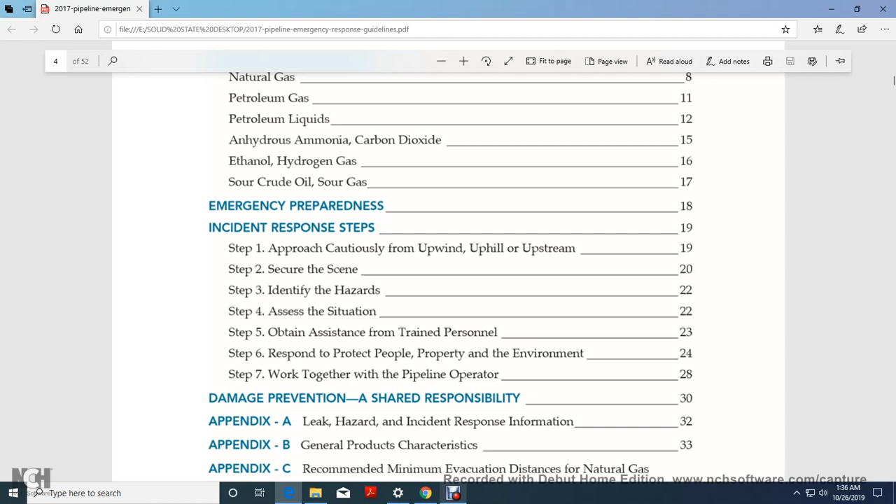Damage prevention, a shared responsibility. Appendix A: leak, hazard, and incident response information. Appendix B: general products and characteristics. Appendix C: recommended minimum evacuation distance for natural gas transmission pipe leaks and ruptures. Appendix D: natural gas leaks inside a building. Appendix E: storage facility, additional resource emergency response capabilities.

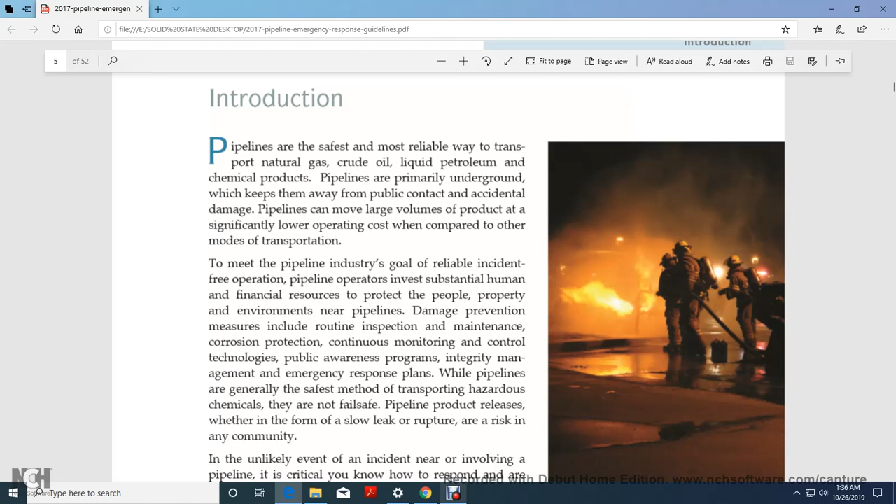Introduction: pipelines are the safest, most reliable way to transport natural gas, crude oil, liquid petroleum, and chemical products. Pipelines are primarily underground, which keeps them away from public contact and accidental damage. Pipelines can also move large volumes of product at significantly lower operating cost compared to other modes of transportation, helping meet pipeline industry goals of reliable, incident-free operation.

Pipeline operators invest substantial human and financial resources in protecting people, property, and the environment near pipelines. Damage prevention measures include routine inspection, maintenance, corrosion protection, and continuous monitoring and control technology, public awareness programs, integrity management, and emergency response plans.

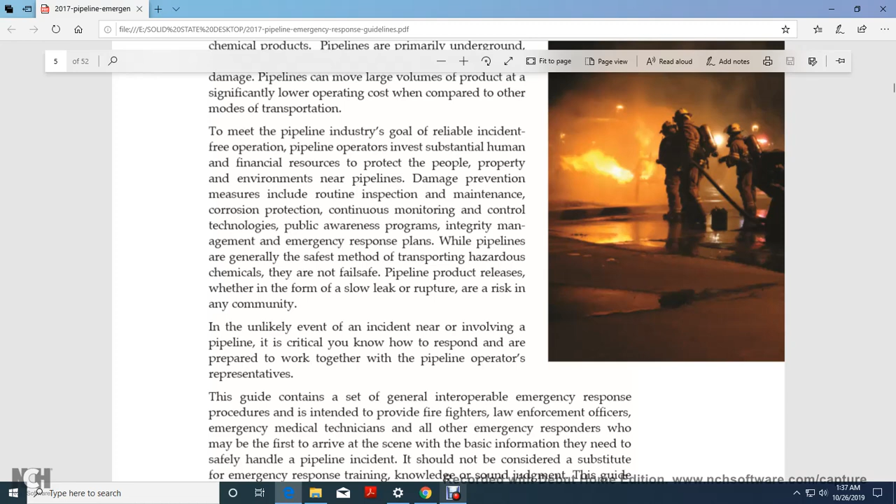While pipelines are generally the safest method of transportation for chemicals, they are not fail-safe. A pipeline product release, in the form of a slow leak or rupture, is unlikely, but in the event of an incident near your community, it's critical that you know how to respond and are prepared to work together with the pipeline operator's representatives.

This guideline contains a set of general, interoperable emergency response procedures intended to provide firefighters, law enforcement officers, emergency medical technicians, and other emergency responders who may be first to arrive at the scene with the basic information needed to safely handle a pipeline incident. It should not be considered a substitute for emergency response training, transportation knowledge, and sound judgment.

The guide contains information that will help you make decisions about how to best protect your emergency response team and the surrounding public during a pipeline incident. Please review and become familiar with these emergency response guidelines before you're called to respond to a pipeline incident.

Pipeline basics. Before we discuss how to respond to a pipeline incident, let's quickly review the basics about pipelines: What are pipelines? What purposes do they serve? Where are pipelines located? How will you identify the pipeline right-of-way with the use of pipeline markers? And how do operators monitor pipeline performance and ensure reliability?

Pipelines in your community. Pipelines are essential; they provide the energy needed to drive cars, heat homes, and cook dinners. People rarely consider how they get the petroleum, natural gas, and other chemical products necessary to power their daily activities.

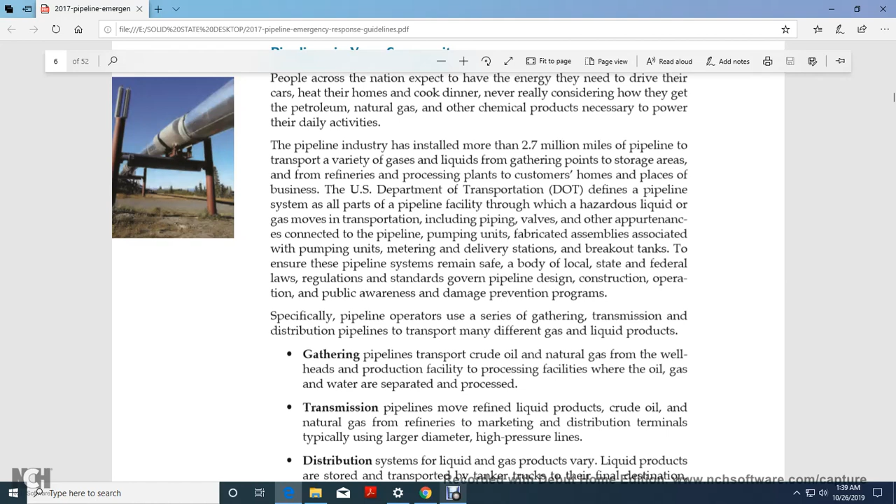The pipeline industry has installed more than 2.7 million miles of pipeline, transporting a variety of gases and liquids from gathering points and storage areas to refineries and processing plants, and on to customers' homes and businesses. The U.S. Department of Transportation defines a pipeline system as all parts of a pipeline facility through which liquid or gas moves in transportation, including pipeline valves and other appurtenances connected to the pipeline, pumping units, fabricated assemblies associated with pumping units, metering and delivery stations, and breakout tanks. This ensures the pipeline system remains subject to local, state, and federal laws, regulations, and standards governing pipeline design and construction.

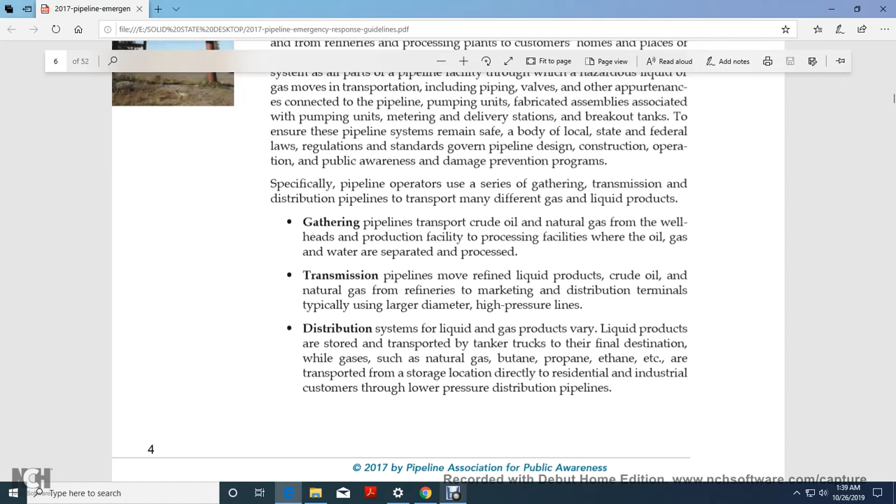Specifically, pipeline operators use a series of gathering, transmission, and distribution pipelines to transport many different gas and liquid products. Gathering pipelines transport crude oil and natural gas from wellheads to production facilities, where oil, gas, and water are separated in the process. Transmission pipelines move refined liquid products, crude oil, and natural gas from refineries to marketing distribution terminals, typically using large diameter, high-pressure lines.

Distribution systems for liquid and gas products vary, but liquid products are stored and transported by tanker trucks to their final destination, while gases such as natural gas, butane, propane, and others are distributed differently.

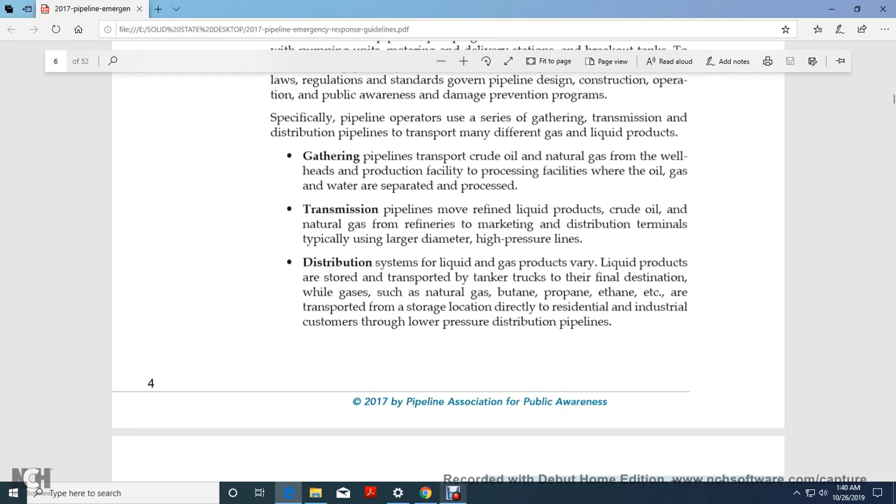Products are transported from a storage location directly to residential and industrial customers through lower pressure distribution pipelines and pipeline rights-of-way. Although typically buried underground, pipelines may also be found above ground in extremely cold, harsh environments, at pump and compressor stations, valve stations, and terminals.

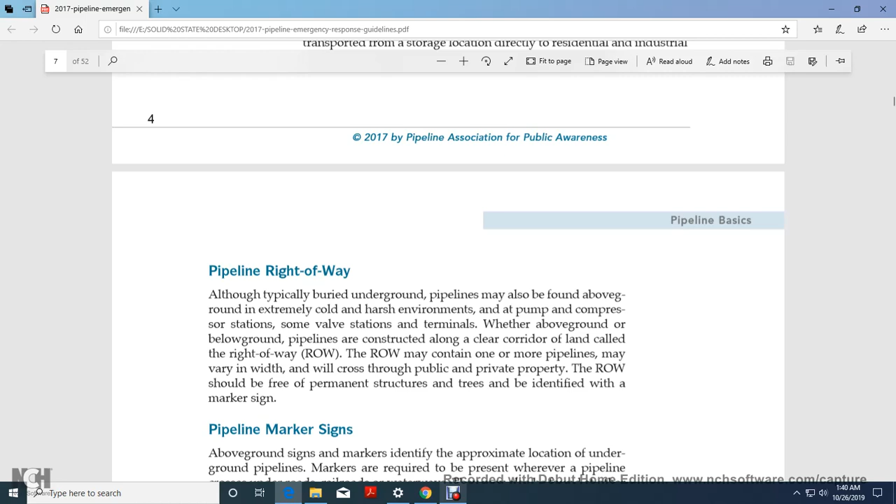Pipeline construction follows a clear corridor of land called the right-of-way. The right-of-way may contain one or more pipelines and may cross public and private property. The right-of-way should be kept free of permanent structures and trees, and should be identified with a marker sign.

Pipeline marker signs identify the approximate location of the pipeline underground. Aboveground pipe markers are required wherever the pipeline crosses roads, railroads, and waterways, and may also be found at other intervals along the right-of-way, such as near buildings or pipeline facilities.

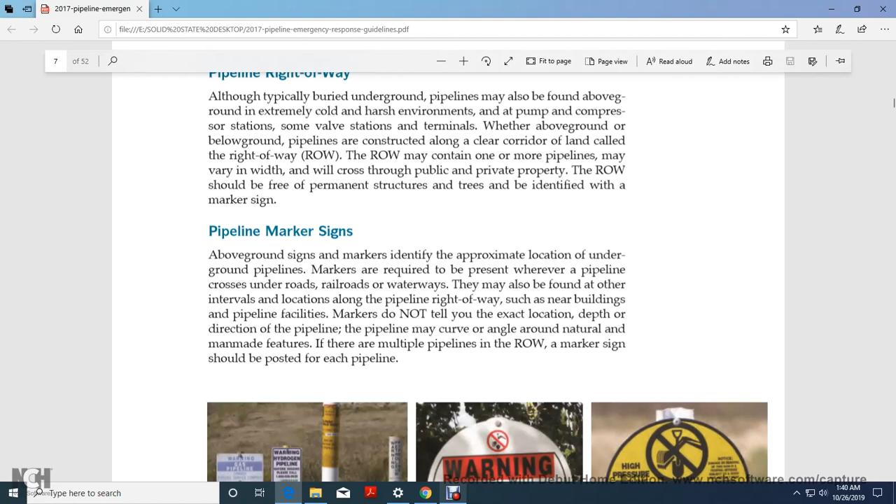If the marker does not tell you the exact location, depth, or direction of the pipeline, keep in mind the pipeline may curve at an angle around a natural or man-made feature. If there are multiple pipelines, a marker sign should be posted for each one. Here is a picture of the pipeline warning signs.

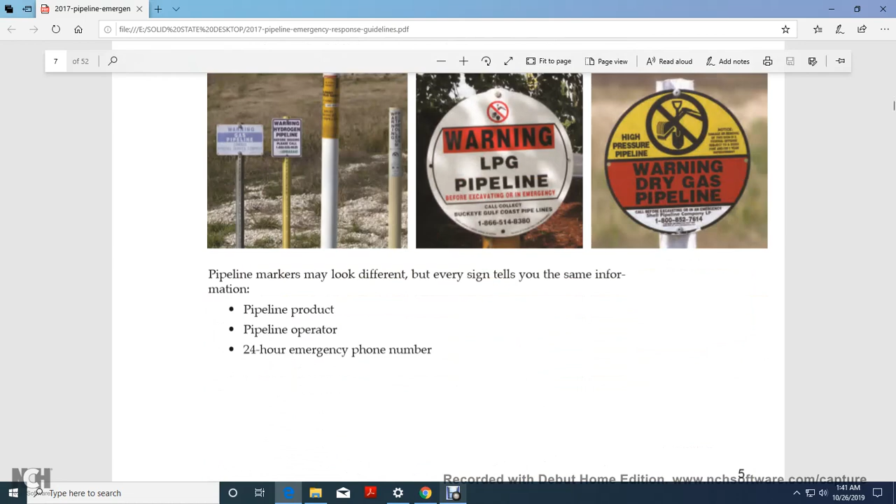Pipeline markers differ in appearance, but every sign tells you the same information: the pipeline product, the pipeline operator, and a 24-hour emergency phone number. If you respond to a call and suspect a leak, approach the scene with caution, look for clues that a pipeline is involved, find the marker sign, and identify the product, operator, and phone number to call to report the incident and obtain additional information.

This brings us to the pipeline control center. When you call the 24-hour emergency phone number on the marker sign, you will speak to someone at the pipeline operator's control center. The control center is at the heart of pipeline operations.

Information about pipeline operation and equipment parameters is constantly communicated to the control center, where personnel and computers monitor pipeline pressure, temperature, flow, alarms, and other conditions. Pipeline operators work hard to achieve reliable, incident-free operation.

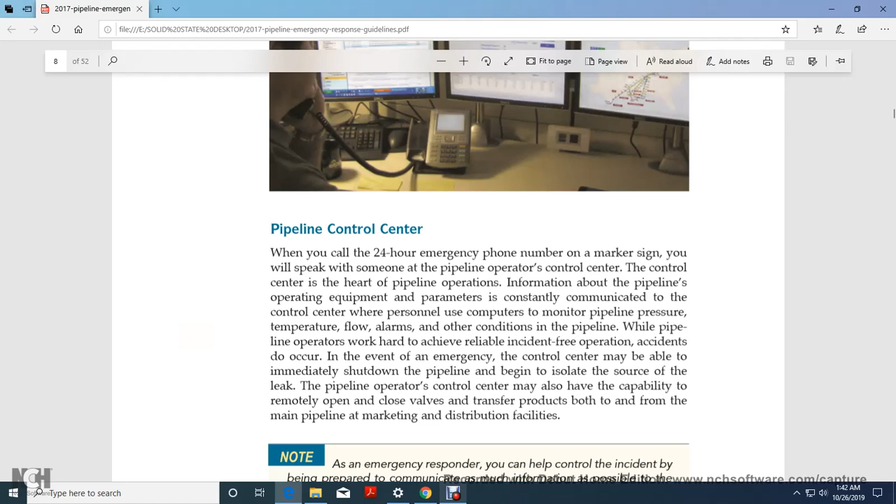Accidents do occur. In the event of an emergency, the control center may be able to immediately shut down the pipeline and begin to isolate the source of the leak. The operating control center may also have the capability to remotely operate, open, and close valves to transfer product both to and from the main pipeline to marketing and distribution facilities.

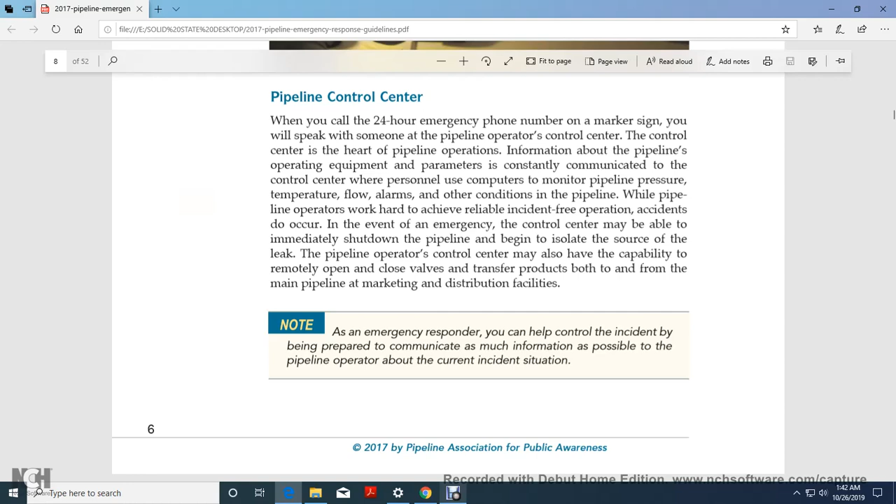Now, how can any emergency responder help? You can help control the incident by being prepared to communicate as much information as possible to the pipeline operator about the current incident situation. This includes using pipeline maps from the National Pipeline Mapping System.

The map provides pipeline transmission contact information for the pipeline operator. You can find the National Pipeline Mapping System at npms.phmsa.dot.gov. The directory can be searched by zip code, state, or county for details of pipeline maps available for emergency response. You can obtain a login ID and password for the Pipeline Integrity Management Mapping Application, or PIMMA access link.

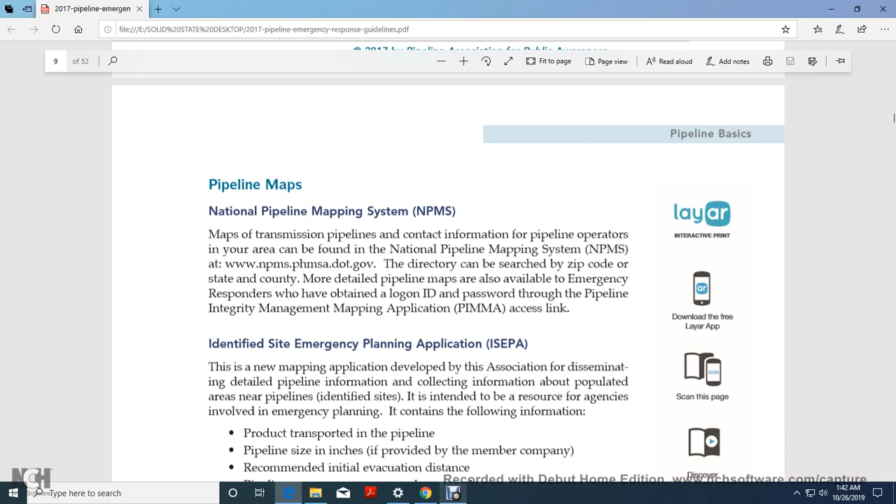This is the Identified Site Emergency Planning Application, or ISEPA.

The new mapping application disseminates detailed pipeline information, collecting information about the population of areas near pipelines, with the intent of reaching agencies involved with emergency planning.

It contains the following information: product transported and pipeline specifications provided by the company, recommended initial evacuation distance, the pipeline company's emergency phone number, the company name, non-emergency contact phone and email address, and a linked document containing additional company information if available.

The mapping application can be accessed at isepa.pipelineawareness.org. If you are visiting for the first time, you may request access. Please click on 'request login credentials.'

Submit your information. Users are cautioned that the application does not include all pipelines. If you zoom in and do not see a pipeline in the area, try navigating to Utah or Salt Lake City as two good examples of what the application is intended to provide.

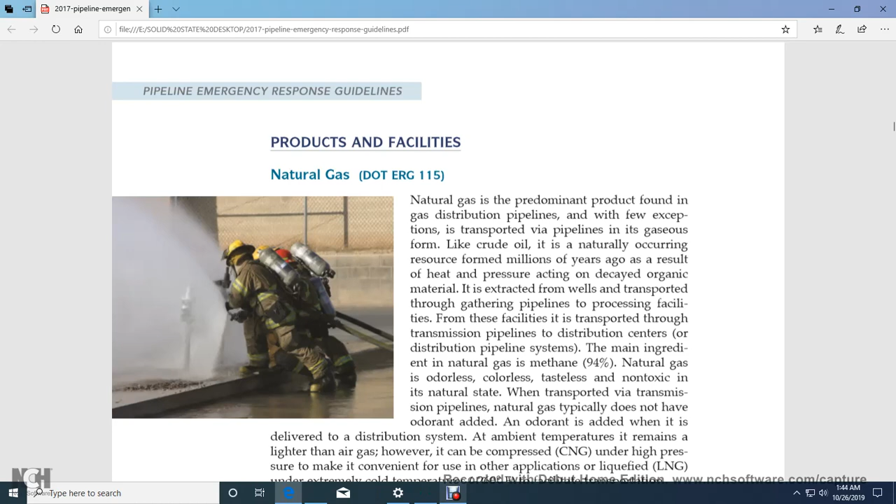The main ingredient of natural gas is methane. Natural gas in its natural state is odorless, colorless, tasteless, and non-toxic, and is transported via transmission pipeline. Natural gas typically does not have an odor; odor is added when it is delivered to the distribution system.

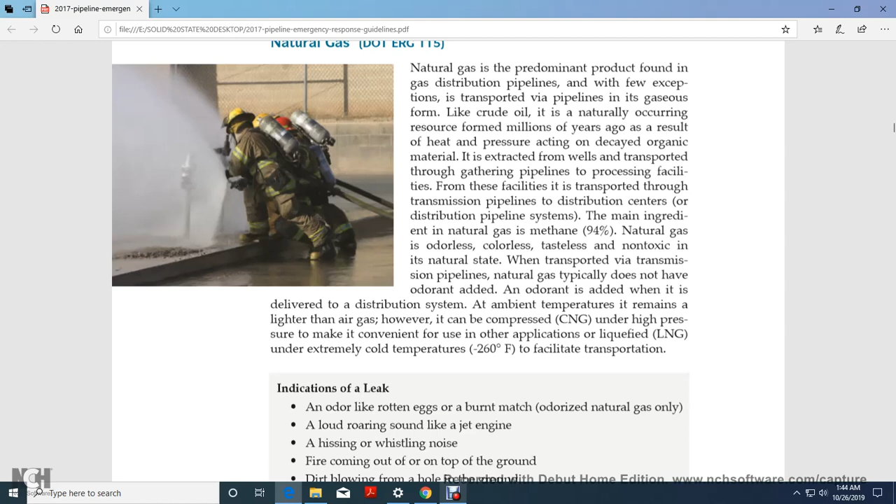Indications of a leak include an odor like rotten eggs or burnt matches. This odor indicates natural gas only.

A loud roaring sound like a jet engine, hissing or whistling noise, fire coming out of or on top of the ground, dirt blowing over a hole in the ground, an area of frozen ground in the summer or melted snow in the winter, and an area of dead vegetation.

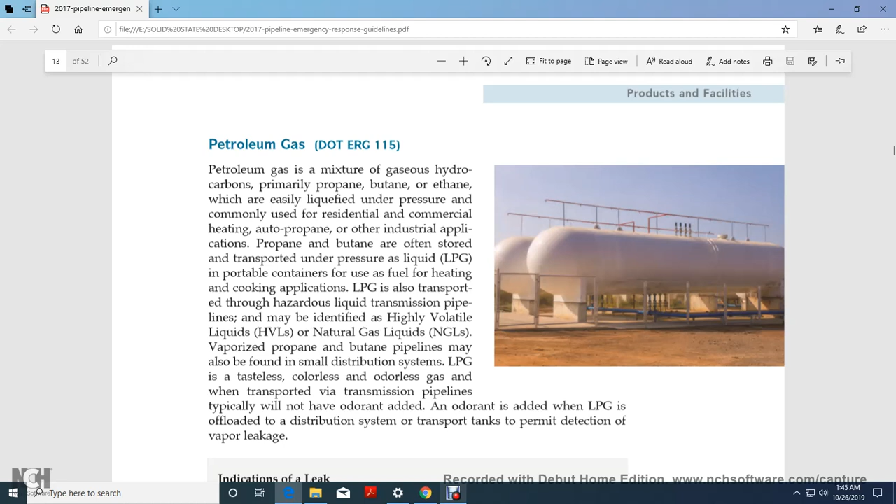Used for residential and commercial heating, auto propane, and other industrial applications. Propane and butane are often stored and transported under pressure as liquid petroleum gas, in portable containers used for fuel, heating, and cooking.

Liquid petroleum gas is transported via liquid transmission pipelines that carry high volatile liquids and natural gas liquids, including vaporized propane and butane. These pipelines may be found with small distribution systems. Liquid petroleum gas is tasteless, colorless, and odorless, and is transported via transmission pipeline typically with no odor added; odor is added when the liquid petroleum gas is offloaded.

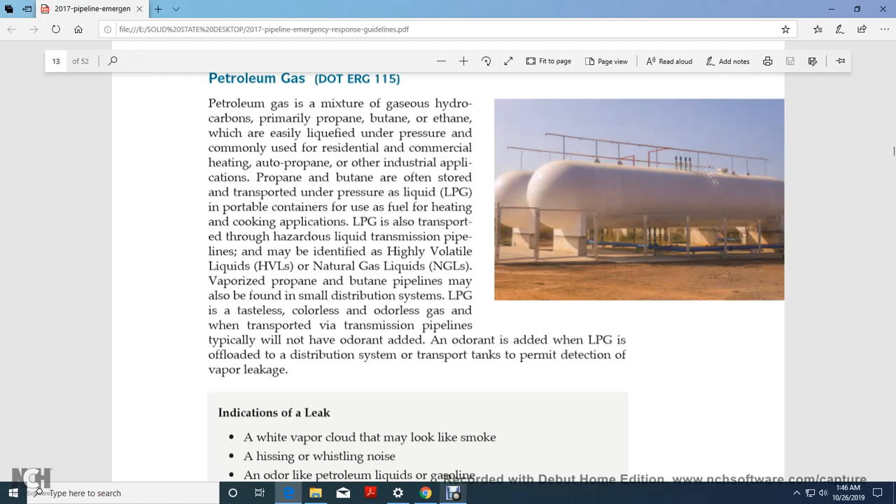Distribution system transportation tanks are equipped to permit detection of vapor leaks. Indications of leaks include a white vapor cloud that may look like smoke, with a hissing or whistling noise, and an odor like petroleum liquids. A gas line fire may come out of the top of the ground.

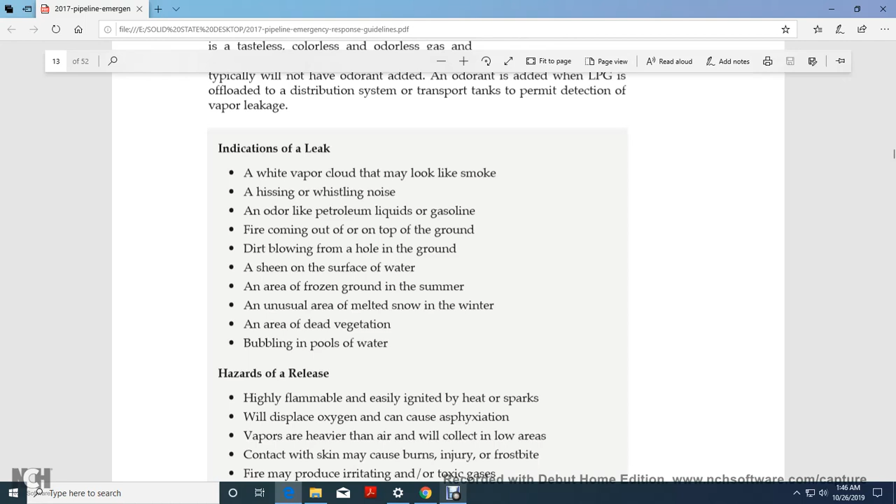Look for dirt blowing from a hole in the ground, a sheen on the surface of water, an area of frozen ground in summer or unusual melted snow in winter, dead vegetation, and bubbling in pools of water. This indicates a high hazard release and is highly flammable, easily igniting from heat or sparks.

It can displace oxygen causing asphyxiation, and since the vapor is heavier than air it will collect in low areas. Contact with the skin may cause burns, injury, and frostbite.

Fire may produce irritating and toxic gases. Vapors may form an explosive mixture with air.

Petroleum liquid gas: Emergency Response Guide 128.

Petroleum liquid is a broad term covering products including crude oil, gasoline, diesel fuel, aviation gas, jet fuel, fuel oil, gas, kerosene, naphtha, xylene, and other refined products. Crude oil is unrefined petroleum extracted from beneath the earth's surface through wells.

Crude oil as it comes from the well contains a mixture of oil, gas, water, and other impurities such as metallic compounds. Refinement of crude oil produces petroleum products that you use every day, such as motor oil and gasoline.

Crude oil is transported from the well to refineries through gathering pipelines. Refined petroleum products are normally transported via transmission pipelines to rail or truck terminals for distribution to the consumer. These products have a natural odor, aiding in leak detection.

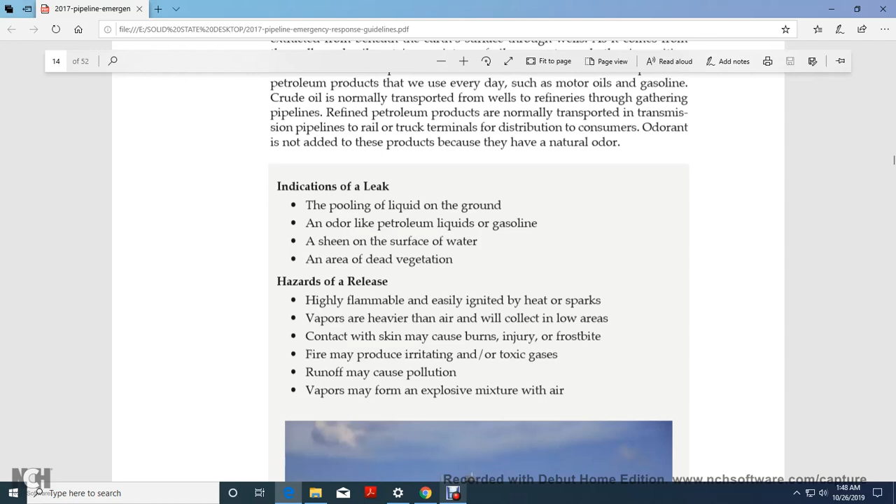Indication of leak: pooling of liquid on the ground, odor of petroleum liquid with a gasoline-like smell, surface water with dead vegetation. Highly flammable, easily ignited by heat or spark, vapors heavier than air will collect in low areas. Contact with skin may cause burns, injury, frostbite; fire may produce irritating toxic gas runoff and may cause pollution. Vapors may form an explosive mixture with air.

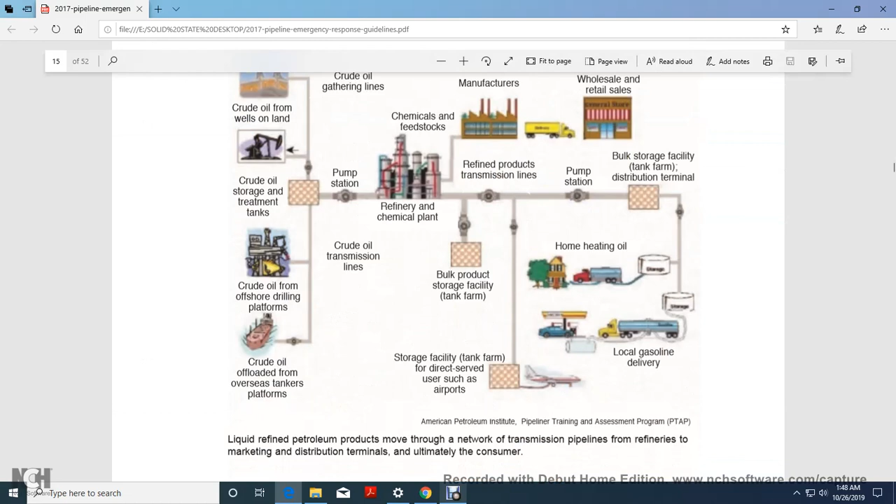Diagram showing crude oil and liquid refined product flowing through the network: transmission pipelines, refineries, marketing, distribution terminals, and ultimately the consumer. This is the typical sequence of petroleum products as they flow through the pipeline.

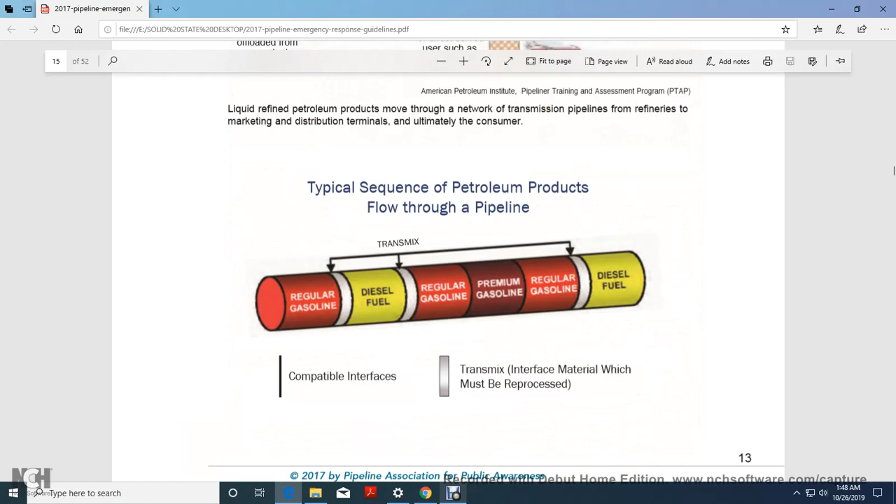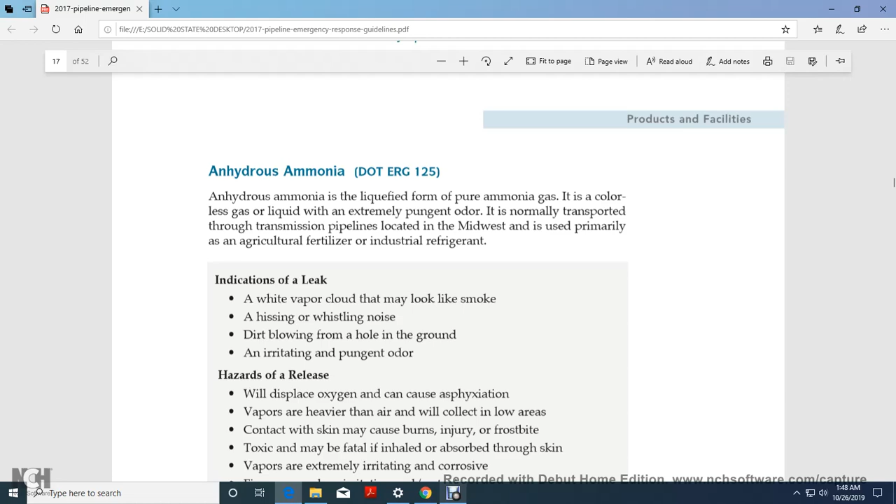Anhydrous ammonia is the liquefied form of pure ammonia gas, a colorless liquid with an extremely pungent odor. It is normally transported by transmission pipeline located in the Midwest, and used primarily as agricultural fertilizer and industrial refrigerant.

Indication of leak: a white vapor cloud that may look like smoke, a hissing or whistling noise, dirt blowing, a hole in the ground, and an irritating pungent odor. A leak will displace oxygen, causing asphyxiation. Vapor is heavier than air and will collect in low areas. Contact with the skin can cause burns, injury, and frostbite.

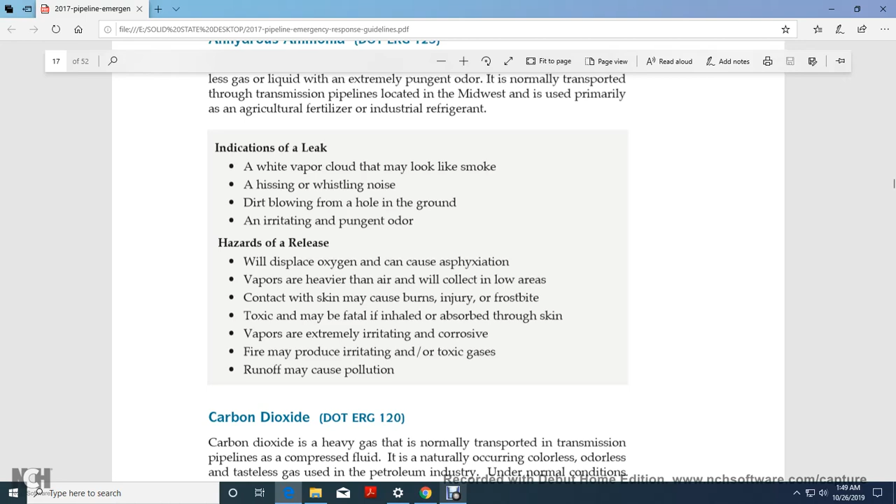It is toxic and may be fatal if inhaled or absorbed through the skin. The vapor is extremely irritating and corrosive. A fire may produce irritating toxic gas runoff and may cause pollution.

Carbon dioxide, ERG 120, is a heavy gas normally transported by transmission pipeline as a compressed fluid. It is naturally occurring, colorless, odorless, and tasteless, used in the petroleum industry. Under normal conditions, carbon dioxide is stable, inert, and non-toxic.

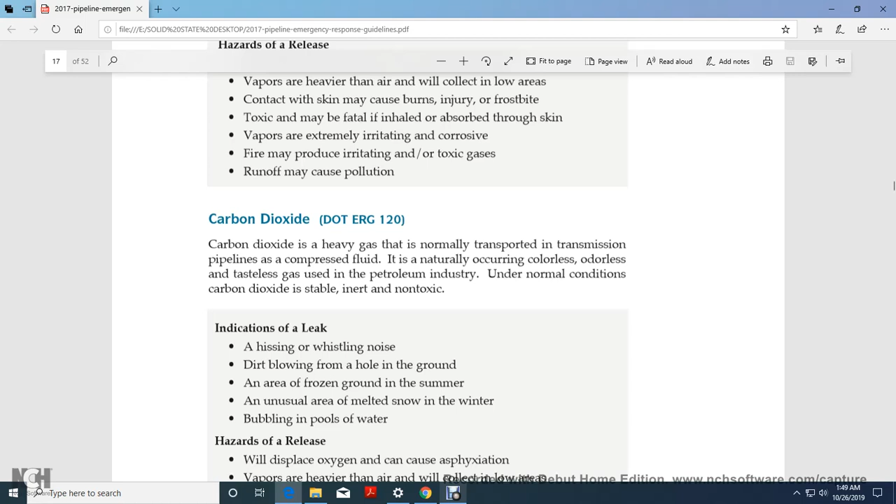Indication of leak: hissing or whistling noise, dirt blowing, a hole in the ground, frozen ground with unusual meltdown in winter, and bubbling in pools of water. The release displaces oxygen and can cause asphyxiation.

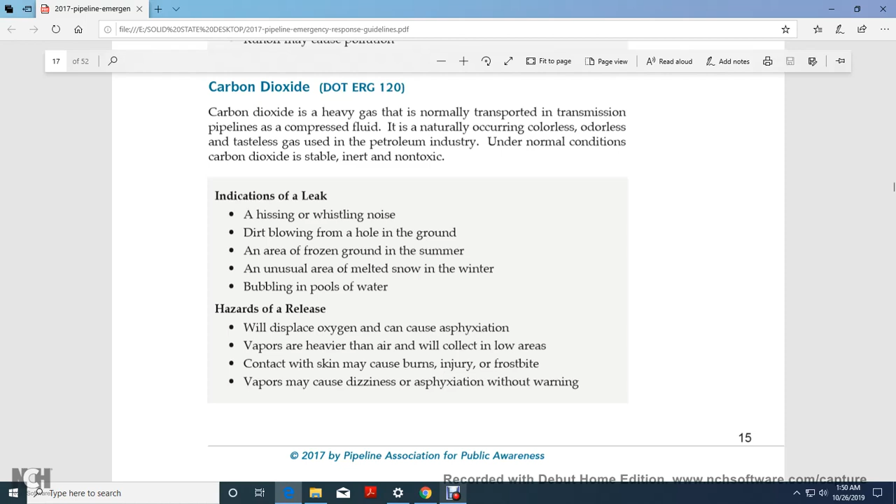Vapors are heavier than air and will collect in low areas. Contact with skin may cause burns, injury, or frostbite. Vapor may cause dizziness and asphyxiation without warning.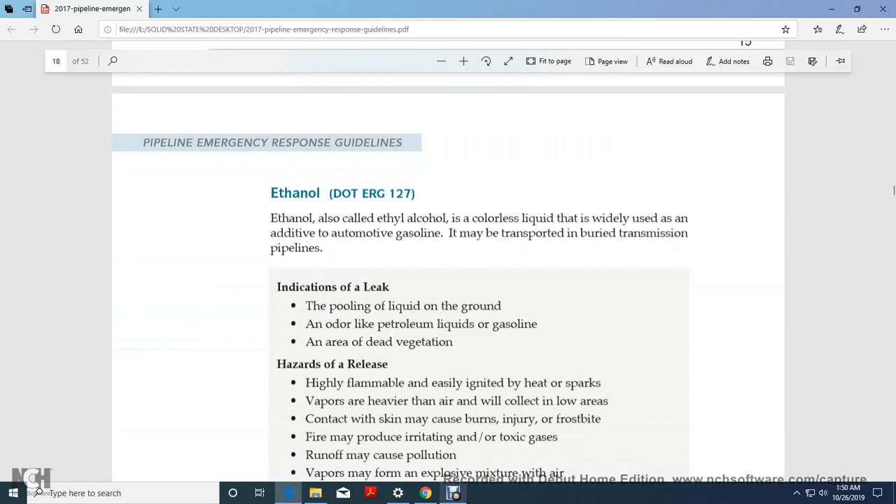Ethanol, also called ethyl alcohol, is a colorless liquid widely used as an additive in automotive gas, transported by buried transmission pipeline.

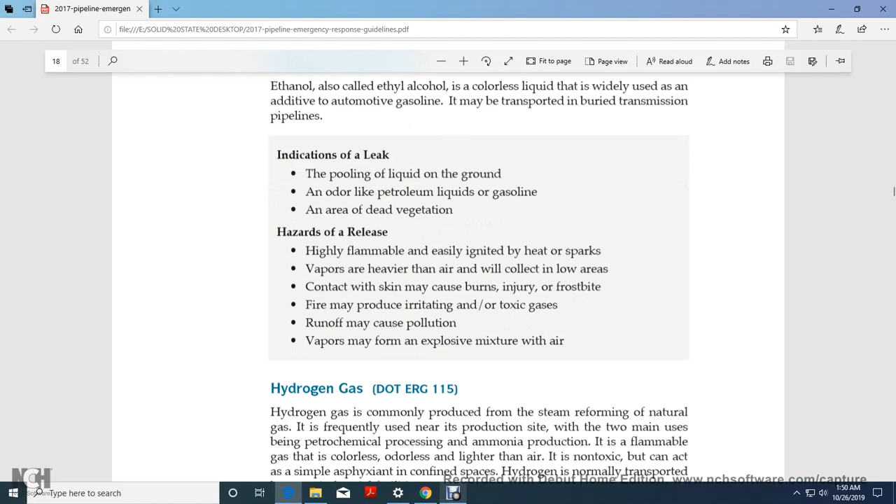Indications of a leak: pooling liquid on the ground, odor of petroleum liquid similar to gasoline, and dead vegetation indicating a liquid hazard release. It is highly flammable and will easily ignite from heat or spark. Vapors are heavier than air and will collect in low areas. Contact with skin may cause burns, injury, frostbite; fire may produce irritating toxic gas runoff and may cause pollution. Vapors may explode when mixed with air.

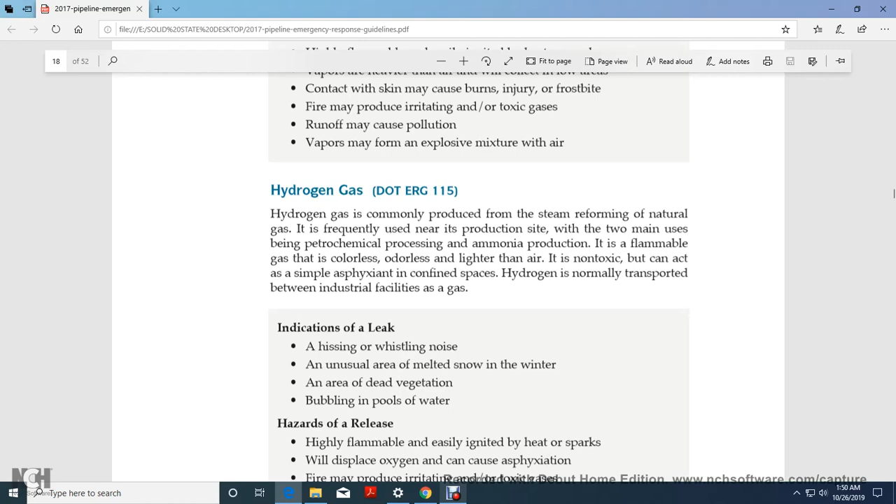Hydrogen gas is commonly produced by steam reforming of natural gas and is frequently used near the production site, with two main uses: petrochemical processing and ammonia production. It is a flammable gas, colorless and odorless, lighter than air. It is non-toxic but can act as a simple asphyxiant in confined spaces. Hydrogen is normally transported between industrial facilities as a gas.

Indications of a leak: hissing or whistling noise, unusual melting of snow in winter, dead vegetation, and bubbling pools of water. It is highly flammable and will easily ignite from heat or spark, and can displace oxygen causing asphyxiation. Fire may produce irritating toxic gas, and vapors may explode when mixed with air, potentially causing dizziness and asphyxiation without warning. Being lighter than air, it can migrate into enclosed spaces.

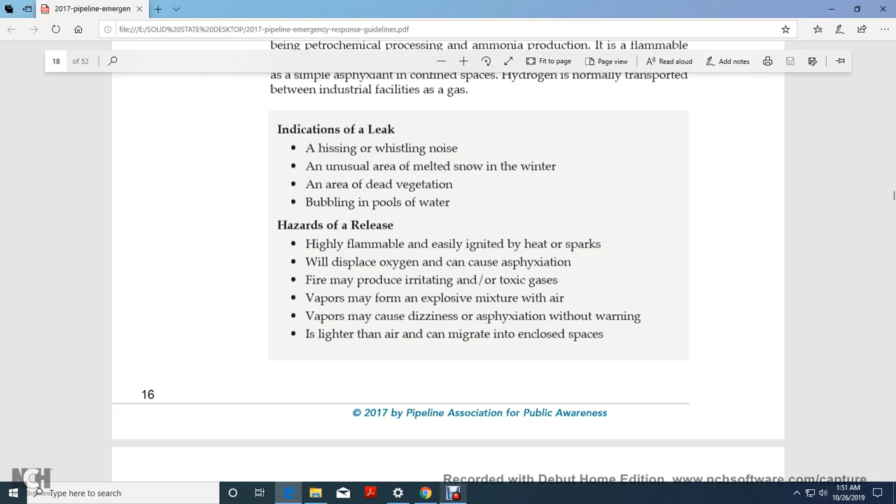Sour gas and crude oil: Emergency Response Guide 131 for sour crude oil, and Emergency Response Guide 117. Products containing little or no sulfur are often referred to as 'sweet,' whereas products containing a high concentration of sulfide are commonly referred to as 'sour.'

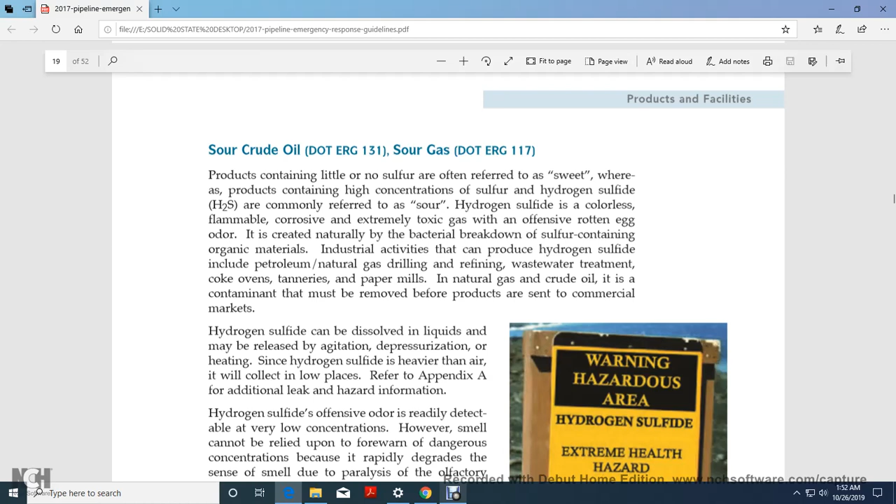Hydrogen sulfide is colorless, flammable, corrosive, and extremely toxic, often smelling of rotten eggs; it results from bacterial breakdown of sulfur-containing organic matter in crude or natural oil. Industrial activities that produce hydrogen sulfide include petroleum and natural gas drilling and refining, wastewater treatment, coke ovens, tanneries, and paper mills. Contamination in natural gas and crude oil must be removed before the products are sent to commercial markets.

Hydrogen sulfide can be dissolved in liquids and may be released through agitation, depressurization, or heating. Hydrogen sulfide is heavier than air and will collect in low-lying areas, which responders must consider.

Appendix A, additional leak and hazard information.

Hydrogen sulfide, or its offensive odor, can be detected at very low concentrations, but cannot be relied on to warn of dangerous concentrations because the sense of smell rapidly degrades due to paralysis of the olfactory nerve.

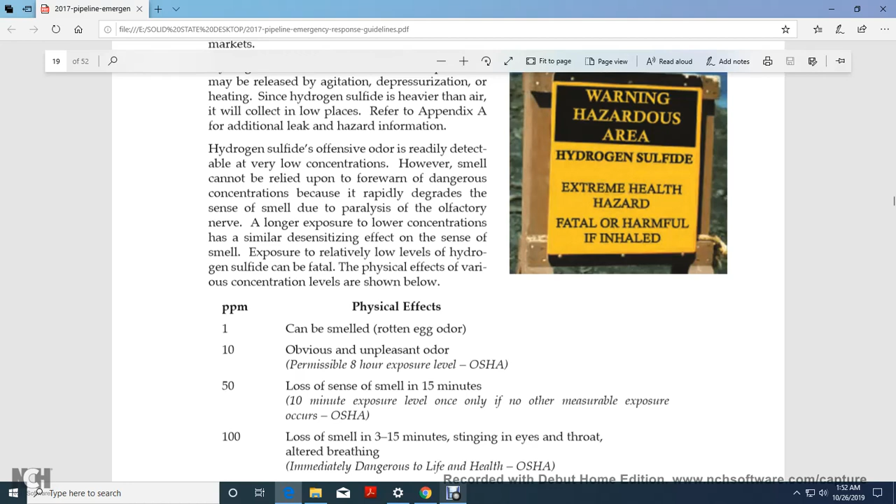Exposure to lower concentrations causes similar desensitization of the sense of smell. Exposure to relatively low levels of hydrogen sulfide can be fatal, with the physical effects varying by concentration level as shown.

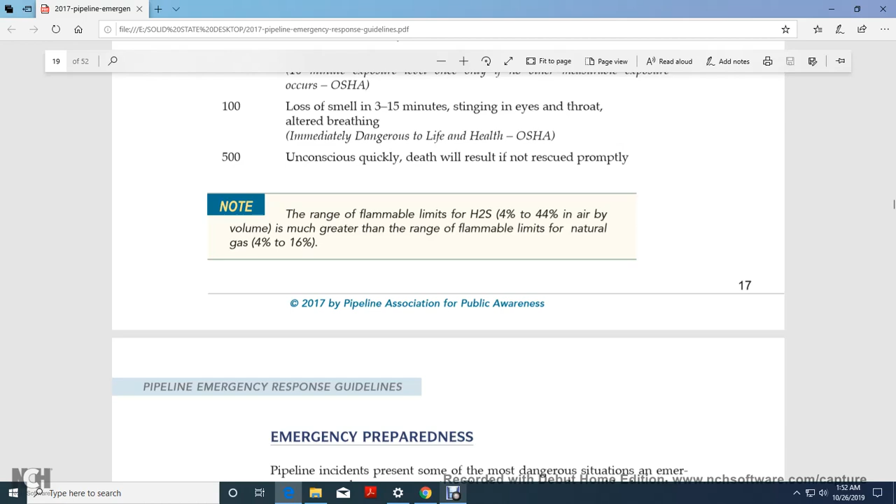At just a few parts per million it can be smelled. The flammable range of hydrogen sulfide in air is 4 to 44% by volume, much greater than the flammable range of natural gas, which is 4 to 16%.

Emergency preparedness: pipeline incidents present some of the most dangerous situations an emergency responder may encounter. Pipelines contain flammable, hazardous, and even deadly petroleum, gas, liquids, and other chemical products.

The area of risk for emergency responders varies depending on topography, weather, property, and the material involved. In the majority of pipeline incidents there are a limited number of options to actually stop the leak, and in almost all cases the pipeline operator must be involved to manage the incident safely.

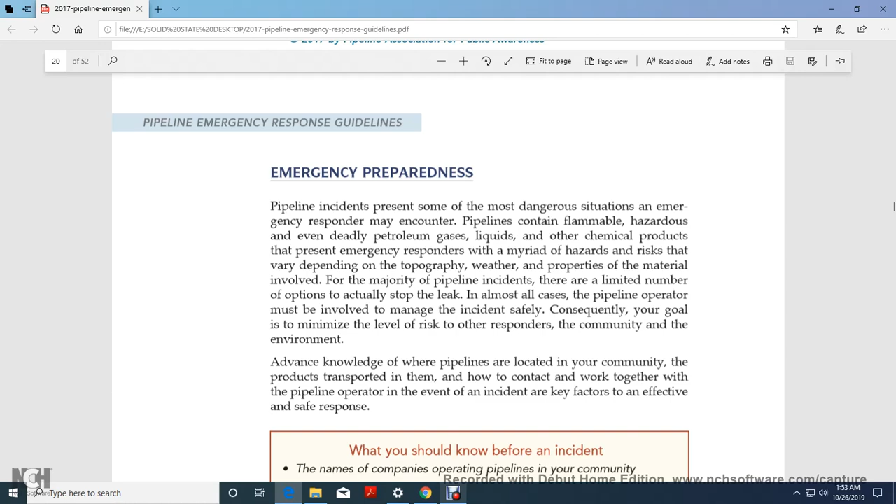Consequently, your goal is to minimize the level of risk to other responders, the community and environment. Advanced knowledge of where pipelines are located, the community and property near them, the products transported, and how to contact and work together with the pipeline operator are key factors affecting a safe response.

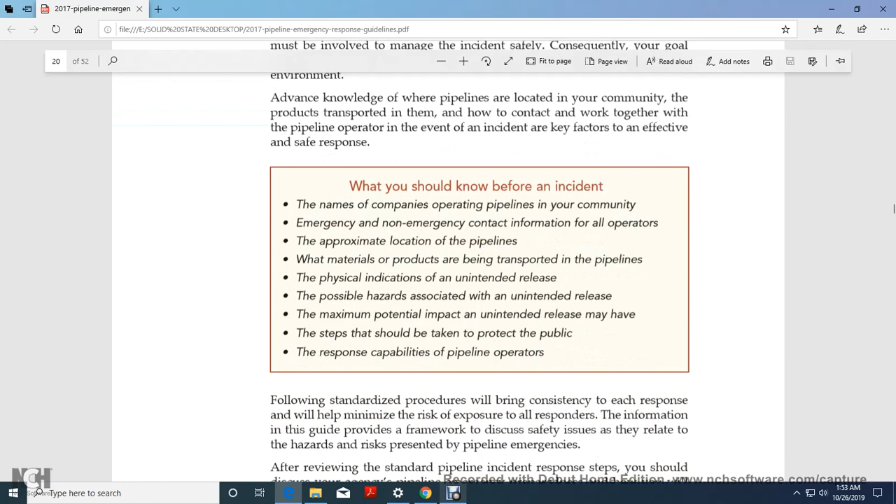What should you know before the incident? The name of the company operating the pipeline, the community, emergency and non-emergency contact information for the operator, the approximate location of the pipeline, and the material or product being transported.

You should also know the physical indications of an unintended release, the possible hazards associated with it, the maximum potential impact an unintended release may have, the steps that should be taken to protect the public, and the response capability of the pipeline operator.

Following standardized procedures will bring consistency, and each response will have minimized risk of exposure for responders. The emergency response guide provides a framework discussing safety issues related to the hazard risks presented by a pipeline emergency, reviewing the standard pipeline incident response steps. You should discuss pipeline emergency preparedness and how you will handle an incident within your community.

Incident steps: to effectively respond to a pipeline leak, spill, or fire, the emergency responder needs to understand the hazard risks associated with the incident. You should seek additional information on the pipeline in question as soon as possible, calling the 24-hour emergency phone number found on a nearby pipeline marker.

Contact the appropriate emergency response agency and consult the emergency response guide, which must provide detailed situation-specific information.

Pipeline operators, you may never have to respond to a pipeline incident, but if you do, remember every incident is different and each will have special problems and concerns. Continue to gather information and monitor the situation as threats move.

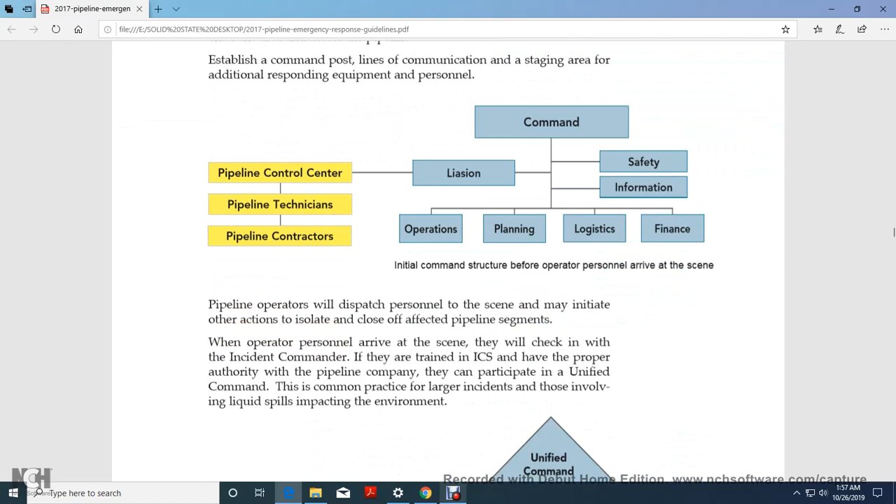A staging area is set up for additional response equipment and personnel. The pipeline operator dispatches personnel to the scene, who may initiate other actions.

Isolate and close off affected pipeline segments. When operator personnel arrive at the scene, they will check in with the trained incident commander.

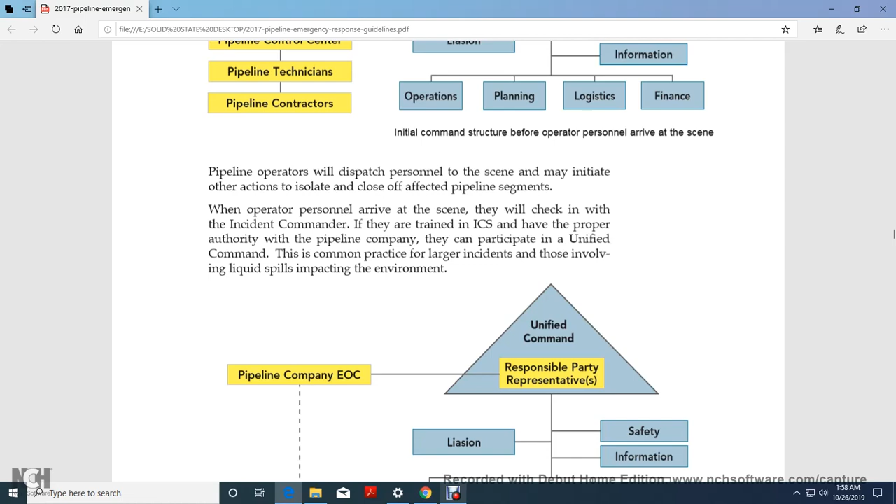Step 3: Identify the hazardous product's physical and chemical properties to determine how the product will behave and how it can cause harm. Emergency responders need to analyze the problem and assess potential outcomes based on the hazardous material involved.

Understanding the hazard will enable you to understand the risk of taking action, and select the basic course of action with the least risk.

Locate the pipeline marker sign, which identifies the pipeline product, operator, and a 24-hour emergency phone number. Call the emergency phone number to report the incident. The pipeline operator's control center personnel may provide additional information about the pipeline product and its hazards.

Use the Emergency Response Guidebook to identify the potential hazard and establish the initial isolation distance to determine the response, with additional information contained in Appendices A, B, and C of this guide.

Use air monitoring equipment appropriate for the pipeline material. Do not assume that a gas or vapor is harmless due to a lack of smell—quick desensitization can occur with strong-odor materials such as hydrogen sulfide and anhydrous ammonia.

Use the highest level of precaution and protection until you know whether there is a flammable, toxic, mechanical, or electrical hazard. Use caution with flammable atmospheres, hydrogen sulfide, crude oil and natural gas pipelines, anhydrous ammonia pipelines, and oxygen-deficient or oxygen-enriched atmospheres.

Step 4: Assess the situation—fire, spill, leak, or vapor cloud—along with weather conditions, wind direction, and terrain.

Consider who and what is at risk to people, property, and the environment, what actions are needed such as evacuation, shelter-in-place, or diking, and what personnel and equipment resources are required.

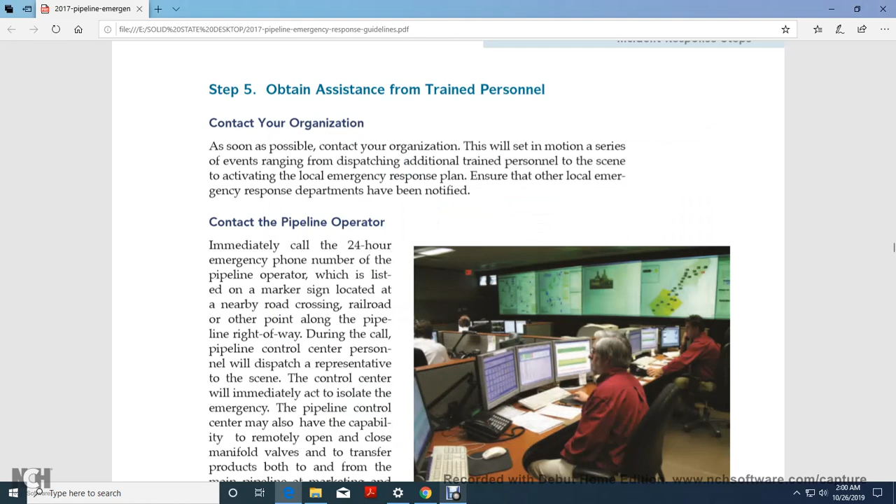Ensure that local emergency response departments have been notified, and contact the pipeline operator immediately.

Call the 24-hour emergency phone number for the pipeline operator, listed on the marker sign located near roads, railroad crossings, or other points along the pipeline right of way.

During the call to the pipeline control center, personnel will dispatch a representative to the scene, and the control center will immediately act to isolate the emergency pipeline section.

The system may also have the capability to remotely open and close manifold valves to transfer product both to and from the main pipeline at a marketing and distribution facility.

Be prepared to provide pipeline control center personnel with the following information: a callback number, the contact name, usually the incident commander, the detailed location including state, county, town, street and road, and the type of emergency such as fire, leak, or vapor.

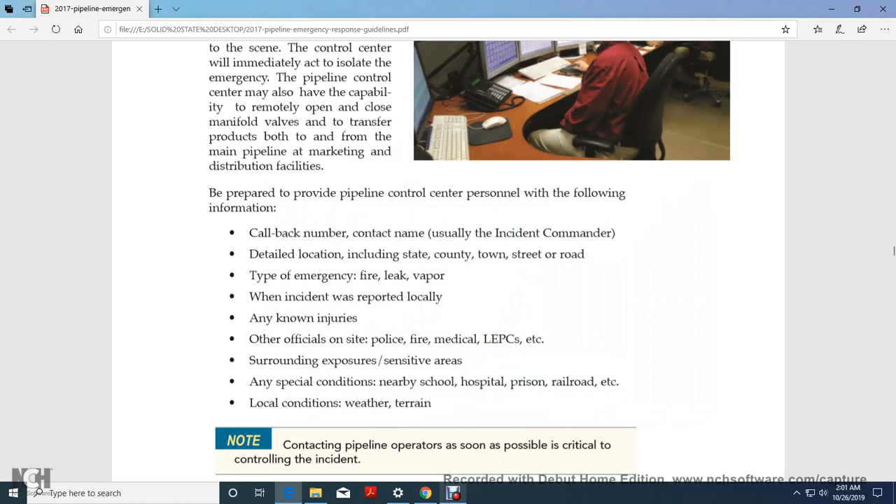Report when the incident was reported locally, whether there are injuries, and other officials on site, including police, fire, medical, and local emergency planning committees, as well as surrounding exposure-sensitive areas, special conditions such as nearby schools, hospitals, prisons, or railroads, and local conditions like weather and terrain.

Step 6: Respond to protect people, property, and the environment. Protection of people is always the highest priority. Protective actions are those taken to preserve the health and safety of responders and the public during a pipeline incident.

Pipeline responders should concentrate on isolating the area, removing ignition sources, and moving the public out of harm's way.

Response procedures should be pursued simultaneously with the need for continuous reassessment, modifying the response accordingly. Rescue and evacuation efforts made to protect people and property and the environment must be weighed against the high possibility that responders could become part of the problem.

Do not walk or drive through a vapor cloud or puddle. Look to evacuate or shelter in place if necessary, and provide instructions and frequent updates to the public while they are evacuated or sheltering in place, administering first aid and medical treatment as needed.

Do not enter the area without wearing appropriate protective gear, such as structural firefighter protective clothing, helmet, coat, boots, gloves, hood, positive pressure self-contained breathing apparatus.

No single type of protective clothing or material will protect you from all dangers at a pipeline incident, so always use the highest level of caution.

Ignition sources to eliminate include electrical motors, firearms, fire vehicles, telephones, cell phones, emergency radios, cigarettes, construction equipment, personal electronic devices, static electricity, open flames, and sparks.

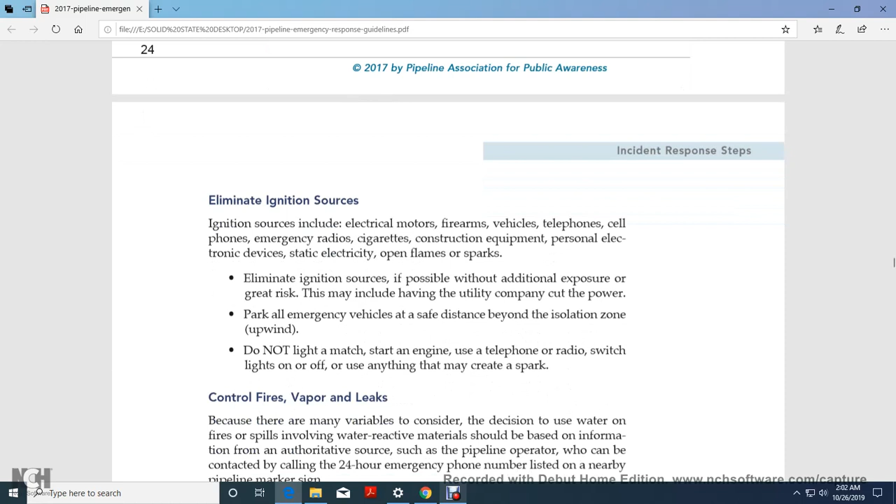Eliminate ignition sources if possible, without additional exposures that pose a great risk, which may include having the utility company cut power at the meter. Park all emergency vehicles at a safe distance beyond the isolation zone.

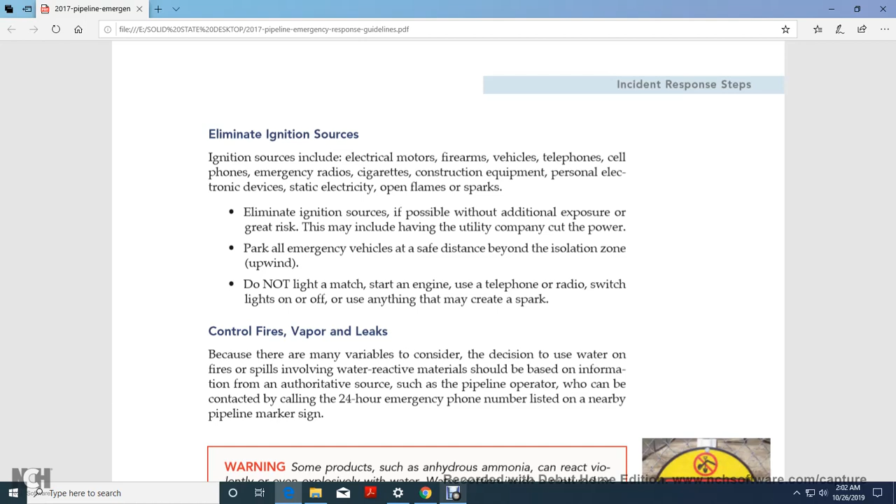Do not light a match, start an engine, use a telephone or radio, or switch a light on or off, or use anything that may create a spark.

Controlling fires, vapor, or leaks requires considering variables in the decision. Using water on fires involving reactive materials should be based on information from an authoritative source, such as the pipeline operator, who can be contacted by calling the 24-hour emergency phone number listed on the nearby pipeline markers.

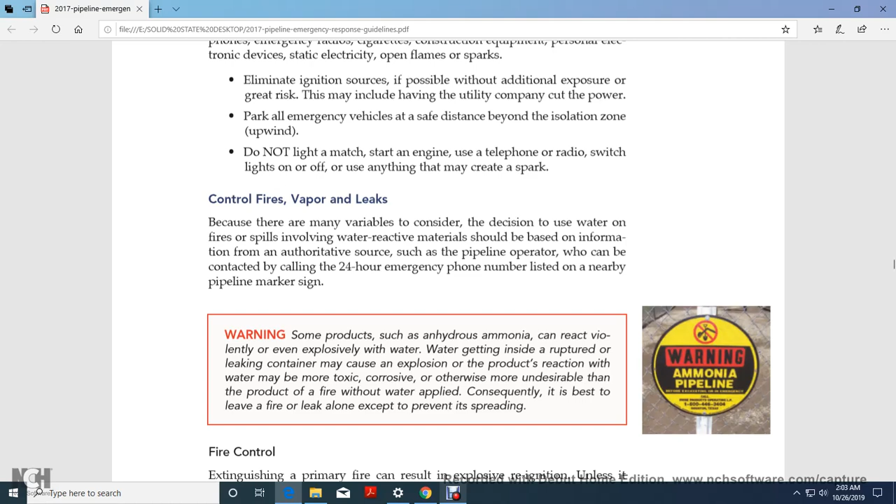Warning: some hazardous products, such as ammonia, react violently with water, especially if it gets inside a ruptured or leaking container, potentially causing an explosion, or the reaction with water may make the product more toxic, corrosive, or otherwise undesirable.

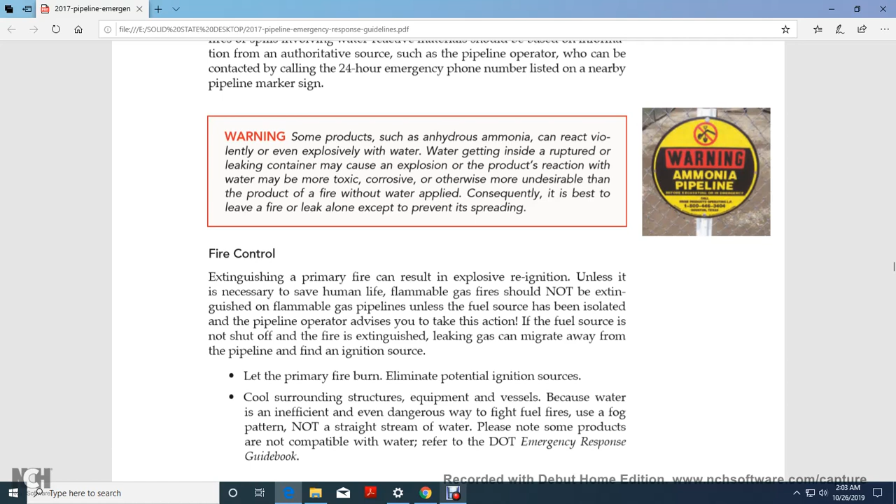When a product fire occurs without water applied, the best course of action may be to leave the fire and leak alone and focus on preventing it from spreading.

Fire control: extinguishing a primary fire can result in explosive reignition unless it is necessary to save human life. Flammable gas fires should not be extinguished on a flammable gas pipeline unless the fuel source has been isolated and the pipeline operator advises you to take that action.

If the fuel source is not shut off, extinguishing the fire may allow leaking gas to migrate away from the pipeline and find another ignition source.

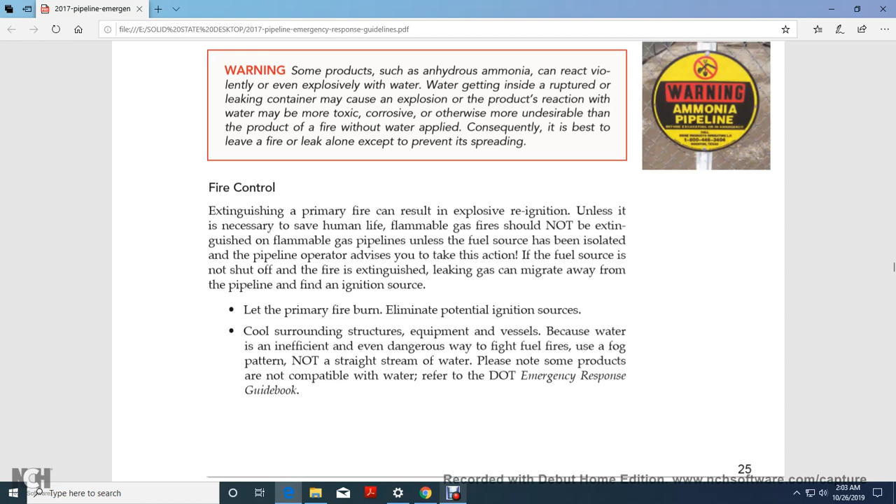Note that some products are not compatible with water; consult the Emergency Response Guidebook. Do not inhale fumes, smoke, or vapors.

Once the primary fire is out, be aware of hot spot reignition, and do not operate pipeline equipment. Vapor control involves limiting the amount of vapor released from a pool of flammable or corrosive liquid.

This requires proper protective clothing, specialized equipment, appropriate chemical agents, and skilled personnel. For this reason, the best approach to containing the hazard is to wait for the pipeline operator's representative who is familiar with handling the pipeline product.

Do not inhale fumes, smoke, or vapors. Eliminate ignition sources, as flammable gas may escape under pressure from the pipeline, allowing the vapor cloud to be ignited by an ignition source in the area, resulting in an explosion.

Unconfined vapor clouds can cause significant structural damage and can quickly escalate the emergency beyond the responders' capability if ignited. Pipeline operators will perform this dangerous task.

Avoid forced ventilation of structures or excavations. Forced ventilation can actually increase the possibility of creating a flammable atmosphere.

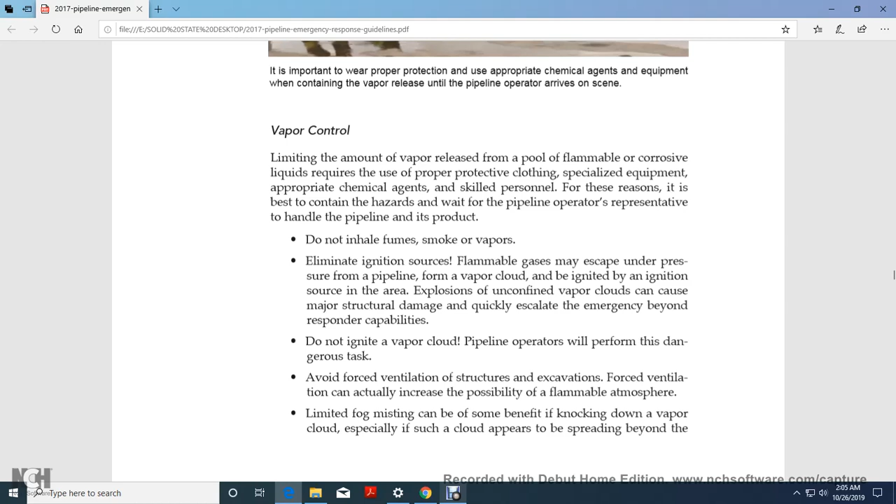Limited fog misting can be beneficial in knocking down the vapor cloud, especially with clouds that appear to be spreading beyond the containment site. Fog misting must be used carefully to prevent an incompatible water mixture from spreading the product to other areas.

Containment dikes may become overfilled. Product-compatible foam can be used to suppress vapors in a rescue situation; however, this is extremely costly and does not stop the fuel discharge.

Use caution before applying water spray, as a form of foam can control vapor emission near the source of ignition. For other technical advice based on chemical name and ignition hazards, refer to the pipeline operator and the Department of Transportation Emergency Response Guidebook.

Leak control is critical given the flammability, toxicity, and oxygen-deficient hazards of liquid petroleum. A pipeline liquid eruption creates a major problem for spill confinement and containment.

A seemingly minor spill may actually evolve into a major spill, as liquid inside the pipeline continues draining off the line. Ask yourself where the spill will be in a few hours.

Several basic containment devices can be used to mitigate petroleum product spills landing in a small stream, including storm sewer manhole dams, stream containment booms, skimming underflow dams, and wire fence or straw filter dams.

For leaks that are accidentally ignited, firefighting should focus on limiting the spread of fire damage, but under no circumstances should efforts be made to extinguish the fire until the source supply can be cut off and controlled.

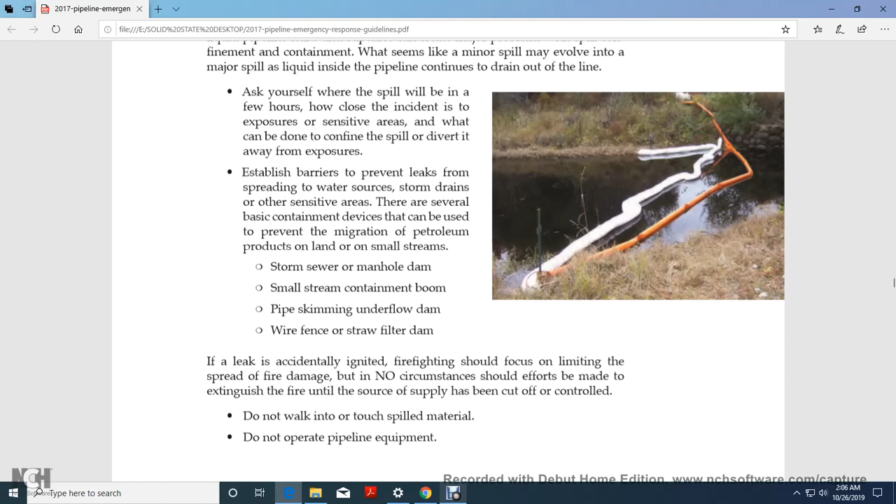Do not walk into or touch spilled materials. Do not operate pipeline equipment.

Step 7: Work together with the pipeline operator. The protection of life is always the highest priority.

The pipeline operator will work with local emergency responders to eliminate possible ignition sources and the leaking vapor cloud, to limit and contain the spill, with communication coordinated among the key elements of the response effort.

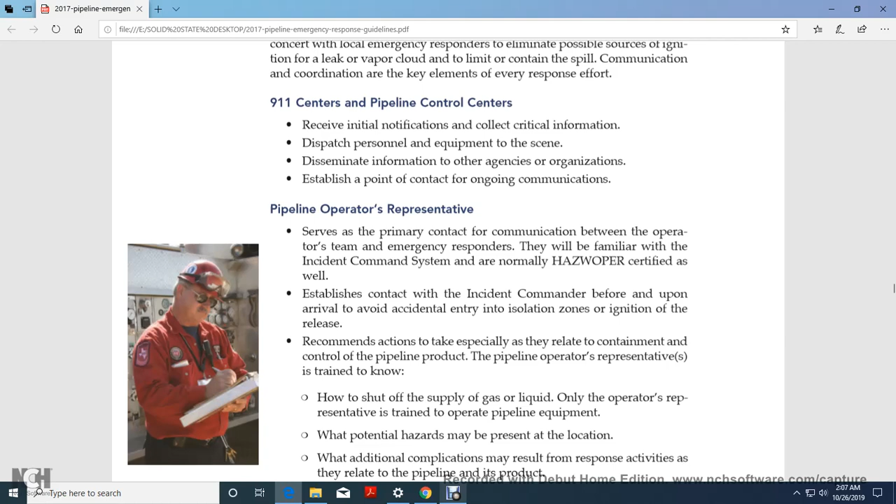The 911 center and the pipeline control center receive the initial notification, collect critical information, dispatch personnel and equipment to the scene, disseminate information to other agencies and organizations, and establish a point of contact for communications.

Pipeline operators and their representatives serve as the primary contact and communication link between the operating company and the emergency responders. They are familiar with the Incident Command System and are HAZWOPER certified as well.

Establish contact with the Incident Commander upon arrival to coordinate actions, intervention, and isolation, and to avoid accidental ignition of the release.

Recommended actions include relaying information on containment and control of the pipeline product, with the pipeline operator's representative explaining how to shut off the gas supply and properly operate the pipeline equipment.

The potential hazard may vary by location. Additional complications may arise in response activities related to the pipeline and its products.

Responders should know how to fight a small fire with a handheld extinguisher, administer basic first aid and CPR, and assist with evacuation and traffic control. Emergency responders maintain site control within the incident command, eliminate ignition sources, and provide standby fire watch personnel to suppress vapor regeneration, along with standby rescue personnel.

Operator personnel enter the incident area to stop the release, help maintain containment dams, and install monitors as needed to manage the atmosphere and repair the contaminated area.

Together with the incident commander, the pipeline operator and representative of public health determine action levels regarding petroleum-related air hazards during the release or discharge, as well as protective actions for the public, establishing a unified command as soon as practicable. The responsible party operatives will take an active role in the incident command structure, reviewing the safety of the operator, emergency response team, and other personnel entering the incident area, and determining the zone of influence, with additional barricading or diking, and coordinating public information needs for the affected area, ensuring relevant information is disseminated to the community.

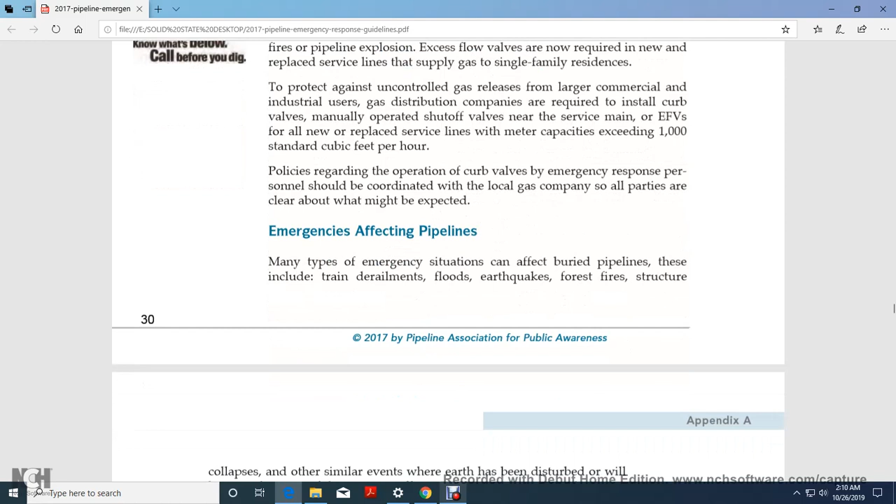Emergencies affecting pipelines: many types of emergency situations can affect buried pipelines. These include train derailments, floods, earthquakes, forest fires, structure collapses, and other similar events that disturb the ground and will be factored into the response efforts for the situation. Pipeline companies should be notified as soon as possible so they can monitor and verify the integrity of nearby pipelines.

Security and damage reporting: in this time of heightened security, one of the most important efforts to protect the pipeline against damage or attack is the Homeland Security infrastructure protection effort, which includes the responsibility to report damage, or unusual and suspicious activity along the pipeline right-of-way, to the pipeline operator.

The operators will immediately investigate and repair any damage. The Transportation Security Administration wants to be made aware of incidents on critical infrastructure and notified of any incident indicative of a deliberate attempt to disrupt the pipeline operation.

Activities that could be precursors to such events include explosions or fires of a suspicious nature affecting pipeline system facilities or assets, actual or suspected attacks on pipeline system facilities or assets, bomb threats, weapons of mass destruction threats against pipeline facilities, theft of pipeline company vehicles, uniforms, or employee credentials, suspicious vehicles around pipeline facilities or rights-of-way, and suspicious photography.

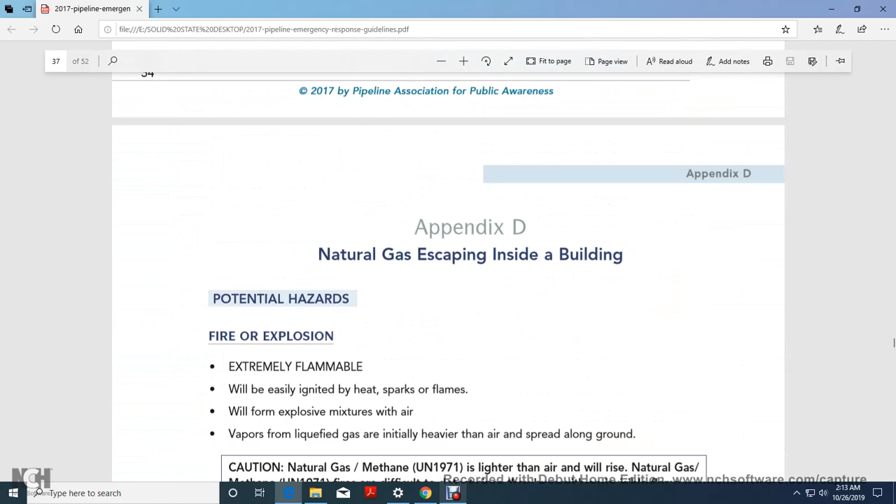Appendix D, natural gas escaping in a building.

And that was a quick look at the Pipeline Emergency Response Guidelines for Pipeline Association for Public Awareness.